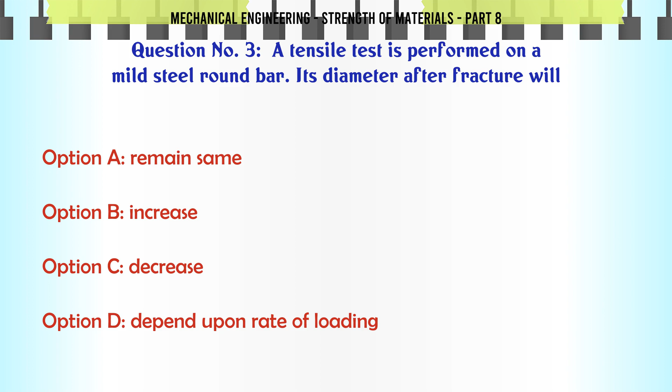A tensile test is performed on a mild steel round bar. Its diameter after fracture will: A) remain same, B) increase, C) decrease, D) depend upon rate of loading. The correct answer is decrease.

Two closely coiled helical springs A and B are equal in all respects, but the diameter of wire of spring A is double that of spring B. The stiffness of spring B will be ___ that of spring A. A) 1/16, B) 1/8, C) 1/4, D) 1/2. The correct answer is 1/16.

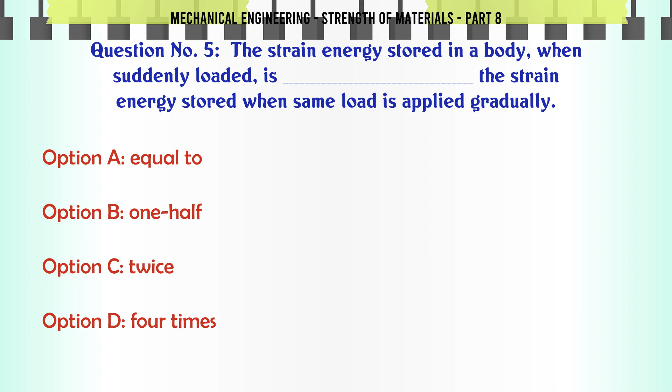The strain energy stored in a body when suddenly loaded is ___ the strain energy stored when the same load is applied gradually. A) equal to, B) 1/2, C) twice, D) 4 times. The correct answer is 4 times.

The shear force at the center of a simply supported beam with a gradually varying load from 0 at both ends to W per meter at the center is: A) 0, B) WL/4, C) WL/2, D) WL²/2. The correct answer is 0.

The proof resilience per unit volume of a material is known as modulus of resilience. A) true, B) false. The correct answer is true.

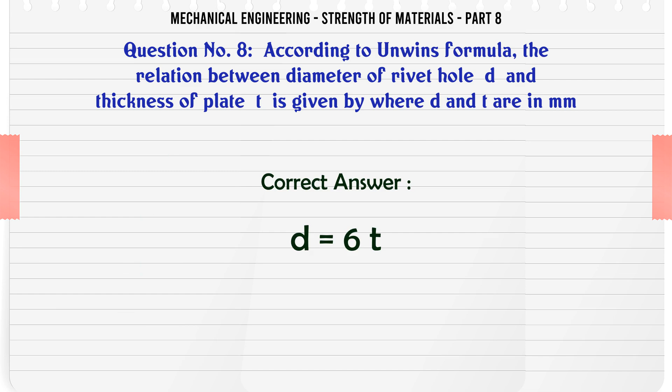According to Unwin's formula, the relation between diameter of rivet hole D and thickness of plate T is given by, where D and T are in mm. A) D=t, B) D=1.6T, C) D=2T, D) D=6√T. The correct answer is D=6√T.

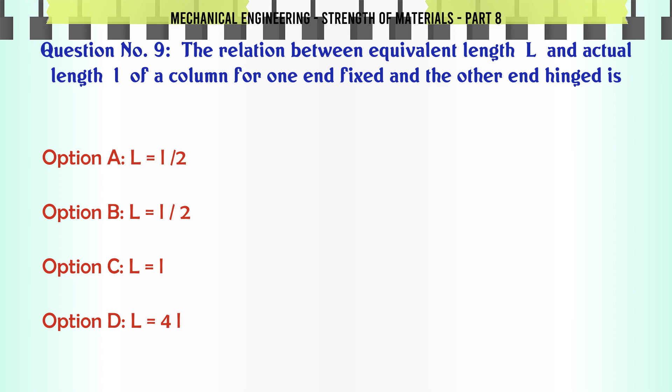The relation between equivalent length L' and actual length L of a column for one end fixed and the other end hinged is: A) L'=L/2, B) L'=L/√2, C) L'=L, D) L'=4L. The correct answer is L'=L/√2.

The total strain energy stored in a body is called proof resilience. A) agree, B) disagree. The correct answer is disagree.

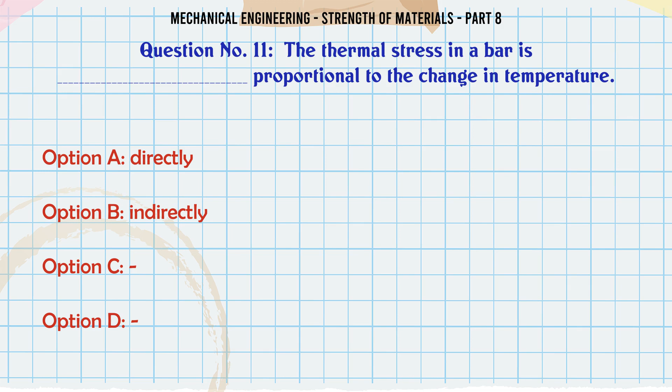The thermal stress in a bar is proportional to the change in temperature. A) directly, B) indirectly. The correct answer is directly.

The section modulus of a circular section about an axis through its CG is: A) πD²/4, B) πD²/16, C) πD³/16, D) πD³/32. The correct answer is πD³/32.

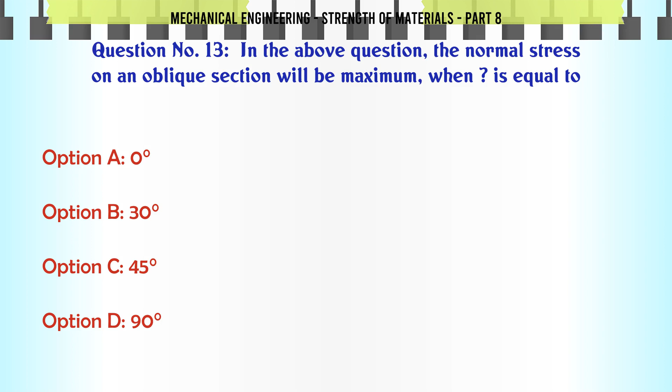In the above question, the normal stress on an oblique section will be maximum when theta is equal to: A) 0, B) 30, C) 45, D) 90. The correct answer is 0.

Which of the following is a proper sequence? A) proportional limit, elastic limit, yielding, failure. B) elastic limit, proportional limit, yielding, failure. C) yielding, proportional limit, elastic limit, failure. D) none of the above. The correct answer is proportional limit, elastic limit, yielding, failure.

The neutral axis of a beam is subjected to ___ stress. A) 0, B) maximum tensile, C) minimum tensile, D) maximum compressive. The correct answer is 0.

When a load on the free end of a cantilever beam is increased, failure will occur: A) at the free end, B) at the fixed end, C) in the middle of the beam, D) at a distance 2L/3 from the free end. The correct answer is at the fixed end.

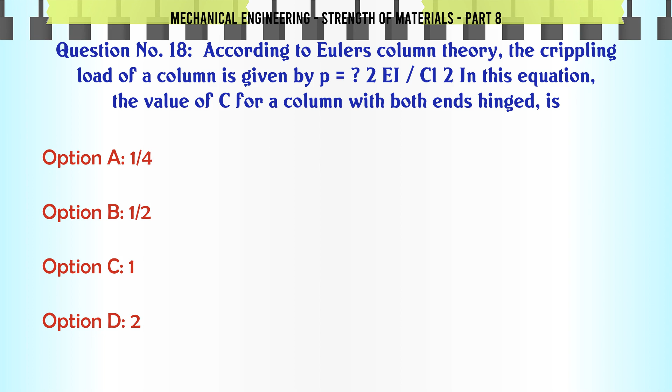According to Euler's column theory, the crippling load of a column is given by P = C·π²EI/L². In this equation, the value of C for a column with both ends hinged is: A) 1/4, B) 1/2, C) 1, D) 2. The correct answer is 1.

The strength of the shaft is judged by the torque transmitted by the shaft. A) yes, B) no. The correct answer is yes.

The shear force at a certain point on a beam changes sign from +ve value to -ve value or vice versa. The bending moment at that point will be 0. A) true, B) false. The correct answer is true.

In a riveted joint, when the number of rivets decreases from the innermost row to the outermost row, the joint is said to be: A) chain riveted, B) zigzag riveted, C) diamond riveted, D) none of these. The correct answer is diamond riveted.

A spring when loaded is permanently distorted and does not recover its original shape when the load is removed. A) agree, B) disagree. The correct answer is agree.

The capacity of a strained body for doing work on the removal of the straining force is called A) strain energy, B) resilience, C) proof resilience, D) impact energy. The correct answer is resilience.

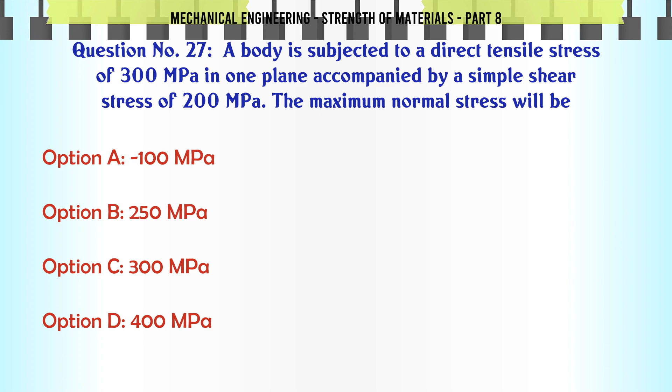A body is subjected to a direct tensile stress of 300 MPa in one plane accompanied by a simple shear stress of 200 MPa. The maximum normal stress will be A) -100 MPa, B) 250 MPa, C) 300 MPa, D) 400 MPa. The correct answer is 400 MPa.

A simply supported beam A of length L, breadth B and depth D carries a central point load W. Another beam B has the same length and depth but its breadth is doubled. The deflection of beam B will be as compared to beam A: A) 1/4, B) 1/2, C) double, D) 4 times. The correct answer is 1/2.

The moment of resistance of a balanced reinforced concrete beam is based on the stresses in A) steel only, B) concrete only, C) steel and concrete both, D) none of these. The correct answer is steel and concrete both.

The load at which the column just buckles is known as A) buckling load, B) critical load, C) crippling load, D) any one of these. The correct answer is any one of these.

The Rankine's constant for a mild steel column with both ends hinged is A) 1750, B) 1600, C) 7500, D) 9000. The correct answer is 7500.

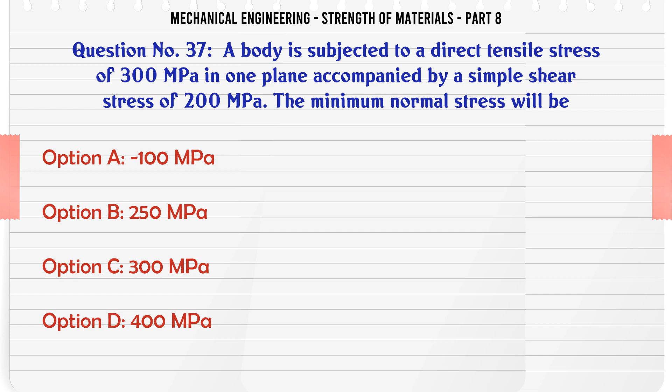A body is subjected to a direct tensile stress of 300 MPa in one plane accompanied by a simple shear stress of 200 MPa. The minimum normal stress will be A) -100 MPa, B) 250 MPa, C) 300 MPa, D) 400 MPa. The correct answer is -100 MPa.

The ratio of linear stress to the linear strain is called A) modulus of rigidity, B) modulus of elasticity, C) bulk modulus, D) Poisson's ratio. The correct answer is modulus of elasticity.

A riveted joint may fail by A) tearing of the plate at an edge, B) tearing of the plate across a row of rivets, C) shearing of rivets, D) any one of these. The correct answer is any one of these.

A shear stress across a plane is always accompanied by a balancing shear stress across the plane and normal to it. A) True, B) False. The correct answer is true.

The bending moment diagram for a simply supported beam loaded in its center is A) a right-angled triangle, B) an isosceles triangle, C) an equilateral triangle, D) a rectangle. The correct answer is an isosceles triangle.

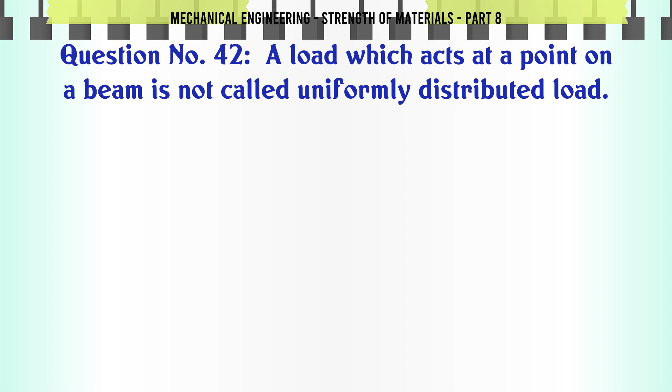A load which acts at a point on a beam is not called a uniformly distributed load. A) Agree, B) Disagree. The correct answer is agree.